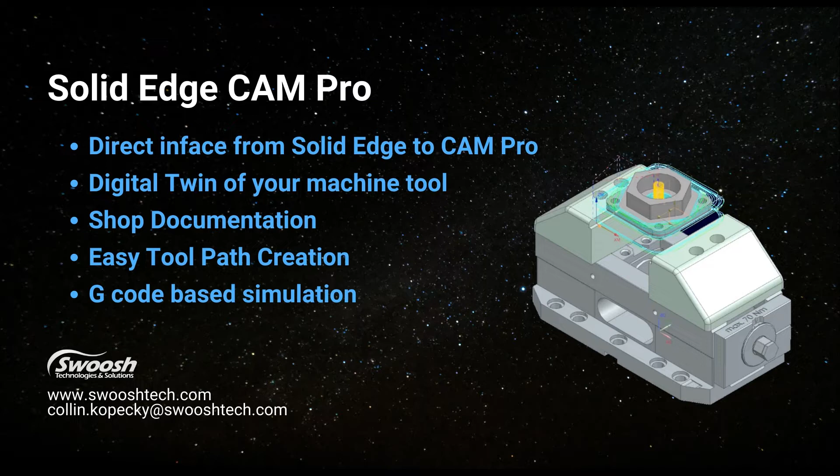Once the programming is complete, with CAM Pro simulation, you can validate the program using full G-code based simulation, and that will detect any sort of collisions or machine axis violations based off of the kinematics of your machine tool. With all the tools available within CAM Pro, you'll be able to provide an accurate and validated NC program to the machine tool operator that will reduce setup times and maximize machine uptime.

Looking at the manufacturing workflow with Solid Edge and CAM Pro, you'll start at the conceptual phase. This would be more of a manufacturing engineering role. This is where you would determine the work holding, stock conditions, and general setup within Solid Edge.

That information would then be transferred into CAM Pro, where you can begin job creation. This is where you would determine the tooling used and create the toolpaths directly from the solid models and assemblies. While creating toolpaths, CAM Pro has a variety of options available to validate each individual toolpath, and will be able to detect any obvious issues using the internal toolpaths, checking against the assembled models.

Once programming is complete, you have a variety of options to create setup instructions to pass along to the machine tool operator. Before the NC code is released, using CAM Pro simulation, you will be able to check the validity of the NC program on a true digital twin of your real-world setup. And finally, with setup instructions and a verified program, the operator will be able to quickly and confidently set up and run the job.

Solid Edge CAM Pro is a modular programming solution. Additional licenses can be added depending on your organization's needs. Starting with basic prismatic part 2.5D milling, you can create single or multiple stage programs, fully taking advantage of collision avoidance and in-process workpiece transfer.

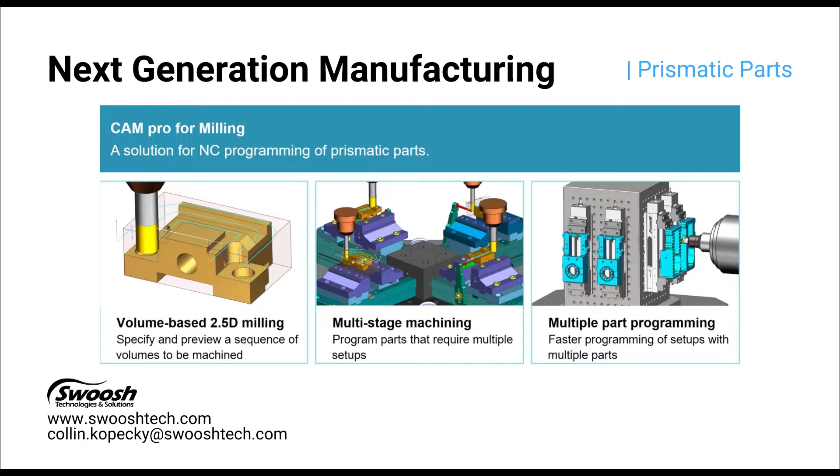With additional licensing, you can expand the capabilities of CAM Pro for more complex 3 and 5 axis surfacing toolpaths, or more specialized toolpaths to create industry-specific parts such as blisks and impellers.

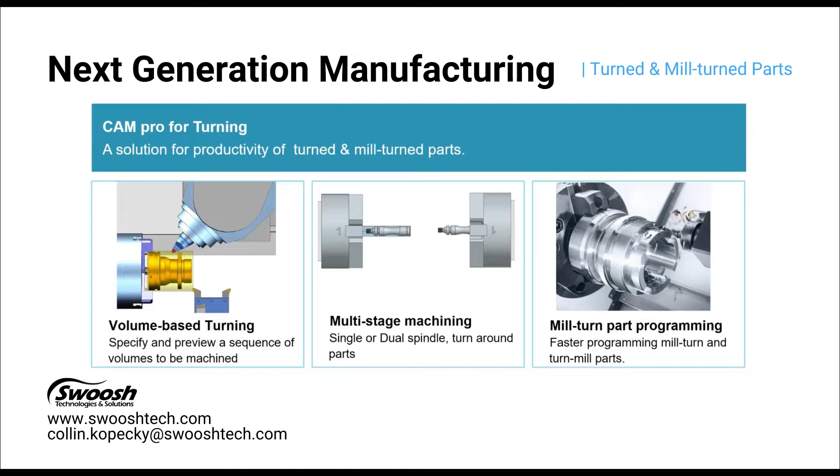CAM Pro is not limited to milling. You are able to create 2-axis turning toolpaths, as well as more complex dual spindle, dual turret, mill turn part programming.

With your program complete, Siemens offers pre-configured post-processors for a variety of machine tools. These are available directly from CAM Pro with Post Hub. Additionally, you can create robust shop floor documentation and provide a validated NC program using CAM Pro simulation to reduce setup times and ensure NC code is correct the first time.

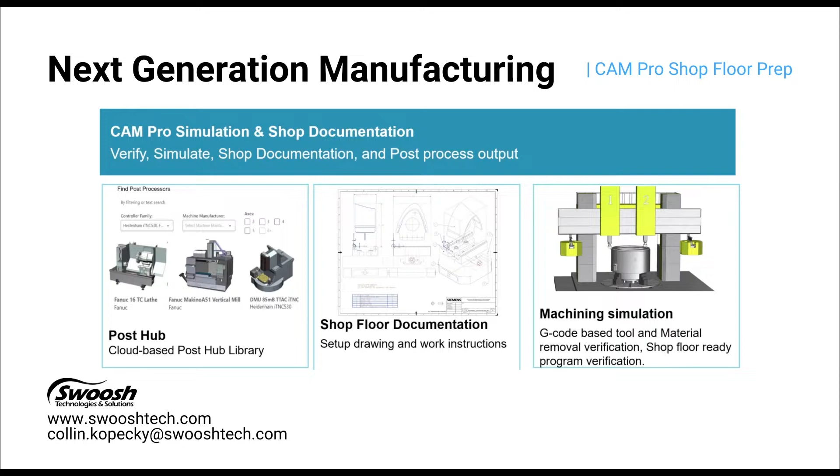Now let me demonstrate for you the process in which to set up a manufacturing file within CAM Pro. I'll start by using the Solid Edge to CAM Pro interface to move our assembly file from Solid Edge to CAM Pro. I'll then define our part and stock and our work holding for use when we create toolpaths, and then I'll import tooling from our library. I'll then go ahead and demonstrate how to create work instructions to be passed along to the operator using the drafting tools that are available to you within CAM Pro.

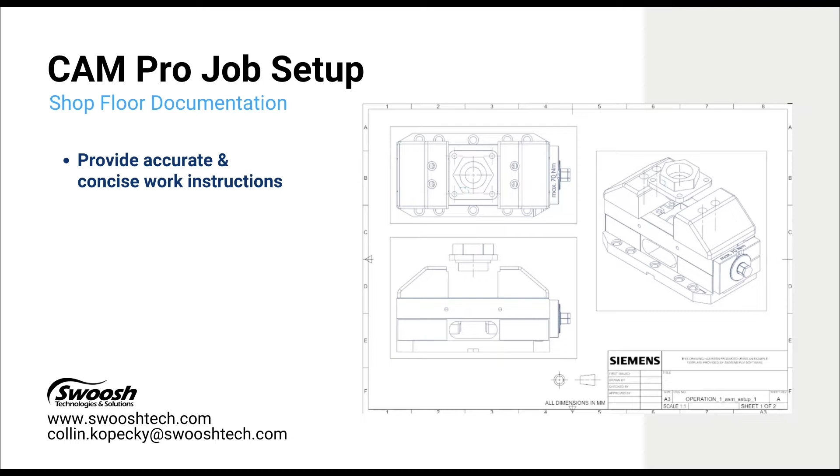Here we are in Solid Edge. We can see we have a fully assembled part. We have our work holding with vise and jaws, our part stock, and our blank, all defined within Solid Edge, using the relations to assemble our assembly. We can move this information into CAM Pro very easily from the tool tabs on the ribbon bar. There's a CAM Pro interface, and that brings our assembled model into CAM Pro.

I'll use this information to create a new setup file, and we can begin preparing our file for manufacturing.

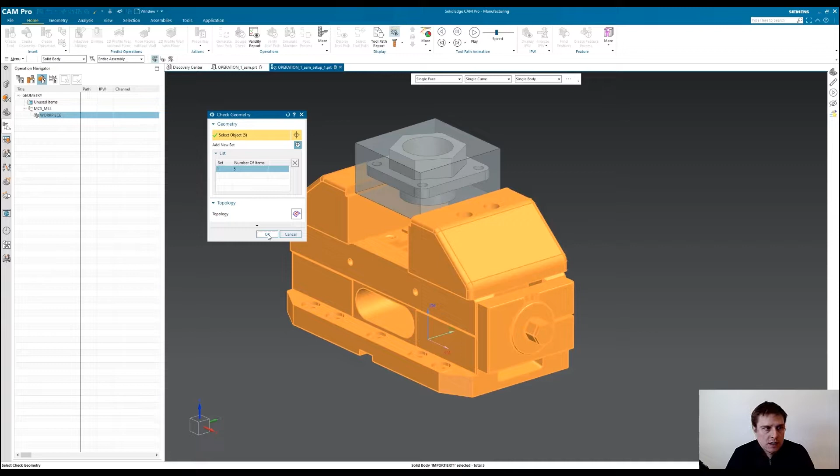I'll go ahead and define my solid geometry. I'll start by defining my part stock and then my blank stock. In doing so, this solid geometry is going to drive our toolpath. So with our blank stock, our toolpaths will be limited to just that blank stock without any additional settings. It's going to automatically recognize the blank stock and limit the toolpath to cut just in those areas. As well as I'm adding check geometry, and check geometry is going to avoid cutting into whatever geometry I've specified. So I specified my jaws and my vise.

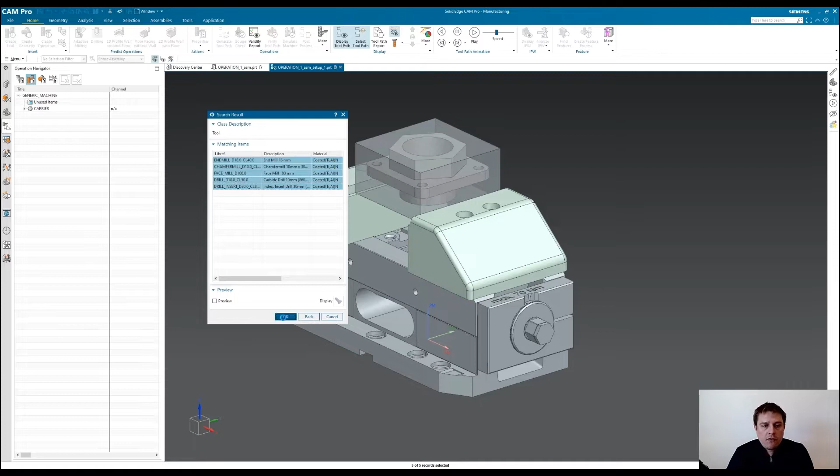Next thing we'll need to create toolpaths is tooling. In CAM Pro, you have the ability to define your tool once and save it to a library, and then retrieve those tools in a new setup file. Here I have 5 tools. I'm going to import all 5 at once.

And now we have the tools necessary to start creating operations. Before I do so, I'm going to create setup instructions using the drafting tools that are available within CAM Pro.

I'm going to start off by creating a draft for the assembly of our work holding. So I'll lay down a few views, and you can have whatever information you deem necessary for the operator to make setup as easy as possible for them. So I have a top and side view and an isometric view to give them a good idea of how the part should be placed, what jaws to use, and so on.

You can go ahead and add some setup notes. Just have a generic message there. It can be as detailed as you want.

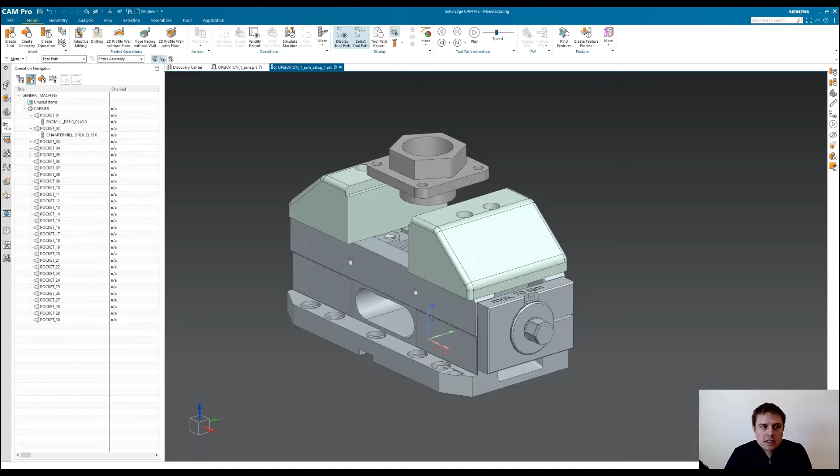Additionally, I'm going to create a draft for our blank stock. Again, the more information, the better for your operator for quick setup, so they have all the necessary information. They're not searching around: what's the size of my blank, what jaws should I use. All of that will be provided to them with these setup instructions.

Again, here I'm creating a draft for our blank. I'll lay down a few views. We can add in some dimensions so the operator knows what size material this is programmed for. And if that matches the real world setup at the machine, they'll know this is good to run.

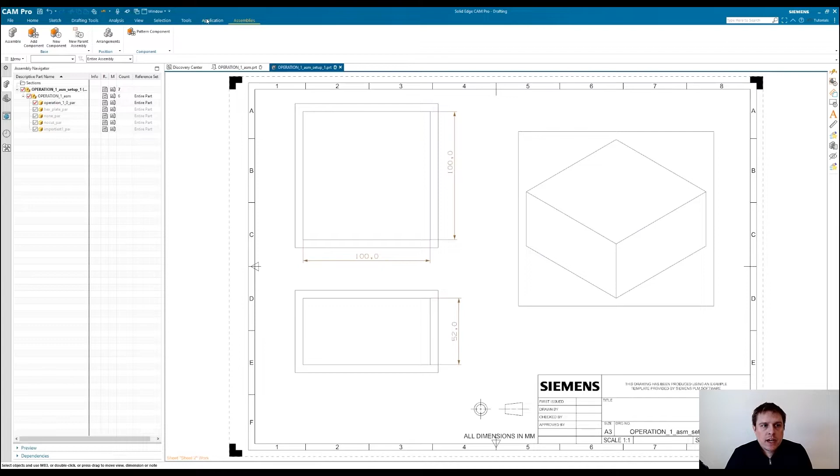So we have our two different views created. We have our geometries defined, and we have the tools necessary to create operations.

With Solid Edge and CAM Pro, you can easily program off a solid model assembly. Having mirrored the assembly that will be on the machine in the real world, we are able to provide detailed setup instructions to the operator, who can easily identify the necessary fixtures, tools, and equipment required to set up and run the job. This will reduce any concerns the operator may have and minimize setup times.

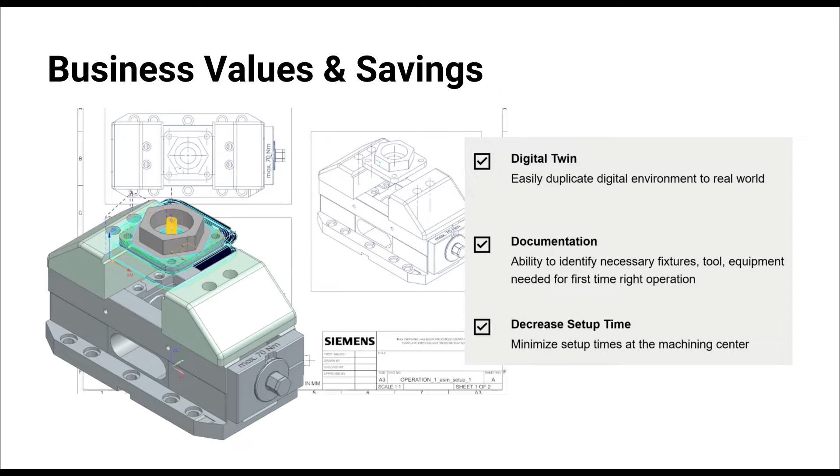Moving on to toolpath creation, I will demonstrate the ability to easily create toolpaths. The toolpaths will be based off the solid models, both the part geometry and blank geometry we specified previously.

CAM Pro utilizes what is known as in-process workpiece, or IPW. IPW starts as the initial state of the blank geometry. Each operation that is created removes material from the IPW, and the material that is removed is tracked in each subsequent operation. This means the toolpaths will be optimized for the current state of the IPW, reducing any unnecessary air cutting.

Additionally, the IPW can be transferred to subsequent operations, removing the need to create the secondary operation blank stock.

Now we'll jump into Solid Edge and I'll demonstrate the programming of this part as well as moving the IPW to the secondary operation. Now that we're back in CAM Pro, I can demonstrate how easy it is to create operations. I'll start by creating a facing operation to remove the material from the top of the part using a face mill.

To create operations within CAM Pro, these are volumetric based. Your selections are going to be based off of your part geometry. So we need only to specify the cut area floor, and I'll select the top surface of our part. We can go ahead and generate, and we have a nice facing operation.

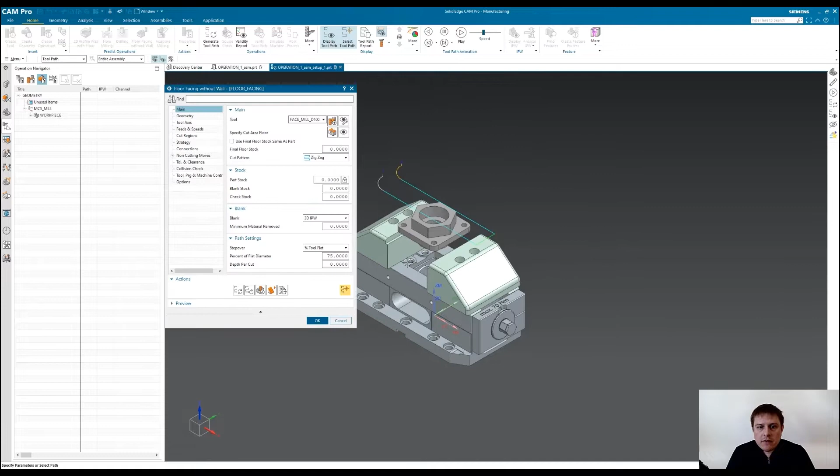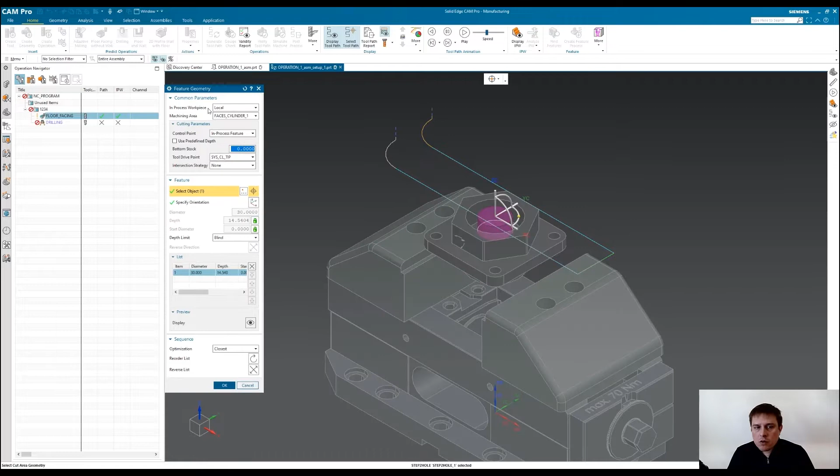The next operation I'll create is a drilling operation, and we'll drill out the center hole of our part. Like before, we need only to specify a face of what we wish to cut. In this case, I want to select a portion of the center hole, and I'll make a few setting changes.

One thing to point out, we see this purple cylinder. That is indicating the material that will be removed from our IPW.

We can take a look at our current state of our in-process workpiece, and we'll note that the face material has been removed, as well as the material removed from our drilling operation. Now each subsequent operation that I create will see that that hole has been removed and base the toolpath off of this current state of the IPW, this pink geometry.

I'll go ahead and create a roughing operation to rough out the hex and that center bore. And for this, I'm going to use an adaptive milling operation, which is a relatively new style of operation.

This is more of a trochoidal style toolpath, where it's taking chip thinning into consideration. You're typically able to, if you're using a solid carbide end mill, use your full flute length of the tool and take a very small step over. With that, you're able to achieve very fast feed rates to remove your material. I've had great success with this in the past on a variety of materials, both ferrous and non-ferrous, to really rough out my material very quickly.

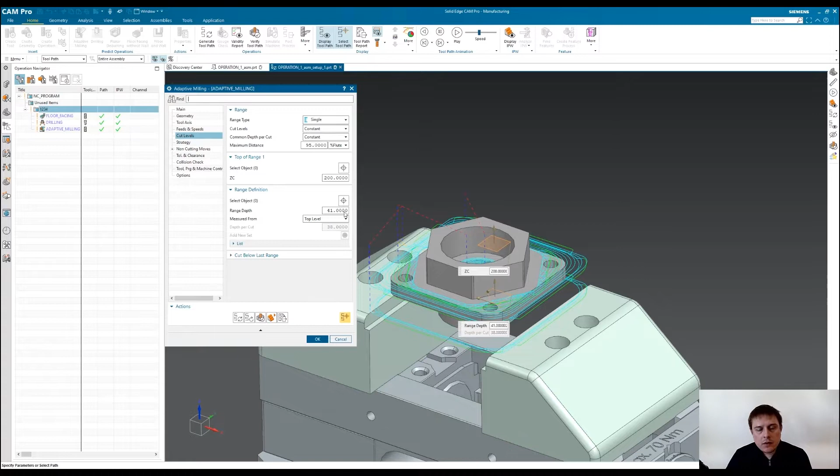We can see based off very few selections, we have a very nice toolpath that's roughing the profile of the part, the hex, as well as our center counterbore.

Moving on, I can create an operation to finish the profile of our part. Just to verify some of our location settings are properly set.

How CAM Pro works is there's a hierarchy. You'll have a parent, and it's going to inherit the information from that parent down to the operation. CAM Pro uses something called methods, and with that method, it's going to inherit the stock allowances into the operation. So with a finishing method, we will not see any stock. It's going to cut right to the wall geometry.

Based off of specifying my wall geometry, I have a very nice profiling toolpath finishing the outside of our part. I'll move on and I'll create a floor finishing for our hex step, this outside area that contains our drilled holes.

Like we've previously seen, we need only to specify what area we want to cut. So I want to cut that step there. And if we want to limit our toolpath to just this outside area, we will need to specify wall geometry.

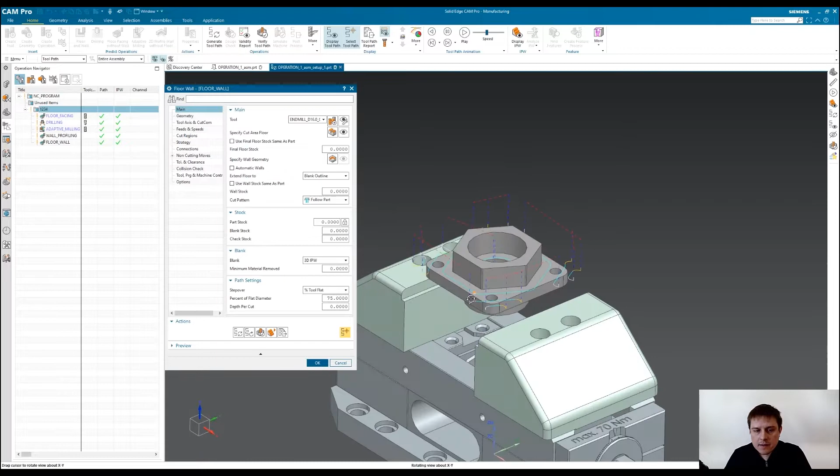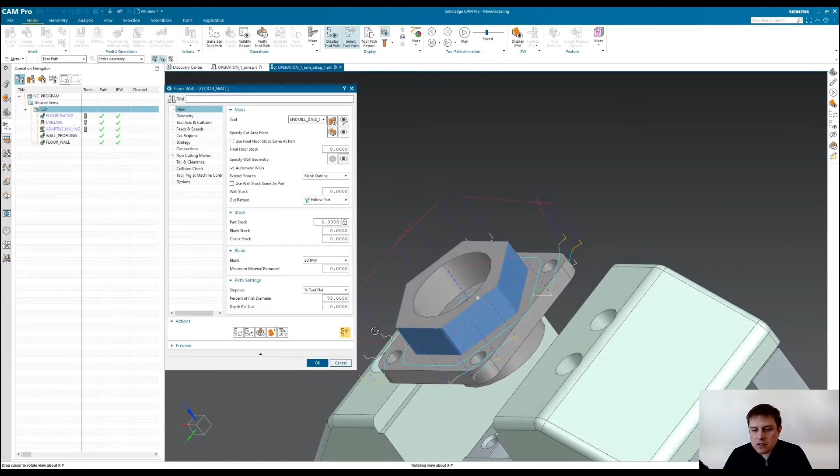Just to demonstrate, we can use this toolpath to fully machine both the step on the outside of our hex as well as this inside diameter. However, I just want to finish the floors of the outside, so we would need to specify wall geometry. We could do that manually, selecting each surface, or there's the ability to automatically detect the walls. If I view what CAM Pro automatically selected, it went through based off of our initial cut area floor selection and selected all of the walls adjacent to that floor.

I can add some part stock to the walls, and we can finish that with a profiling operation. So if that was a critical tolerance that you wanted to cut with a secondary tool, or have a spring pass, adding some stock on this floor finishing pass would be ideal.

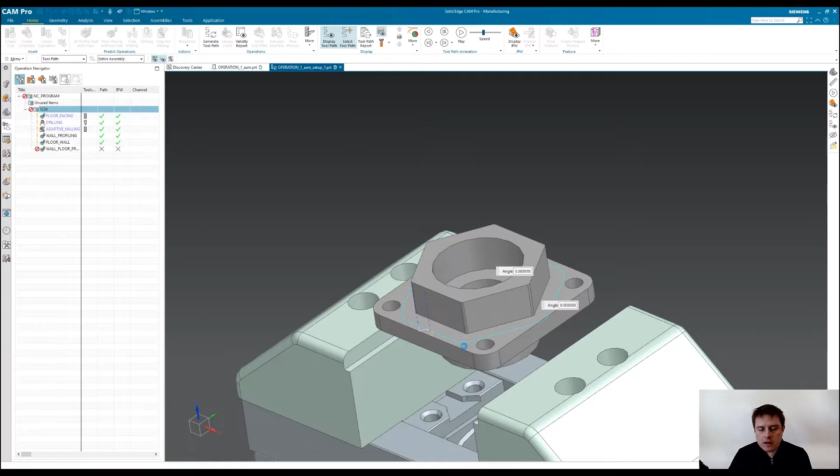Next thing I'll do, I'll create that finishing pass for the hex. And like before, we're able to only specify our cut area floor and toggle on automatic walls, and CAM Pro, again, will automatically detect the walls adjacent to our floor. Once we generate, we have a nice profiling operation to finish the hex of our part.

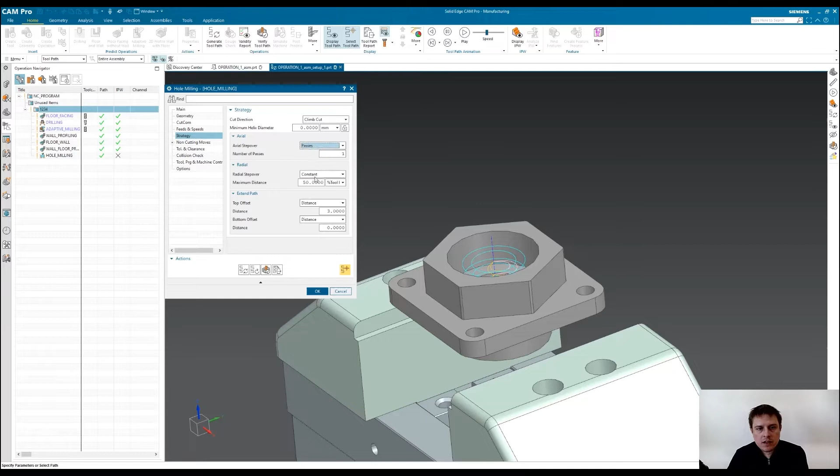Moving on, we can create a hole making operation to mill our counter bore. And we'll make our selection of our counter bore. We can change our cut pattern type to circular. So we'll just plunge down to the bottom of our part and take one pass, removing that material. Looks good.

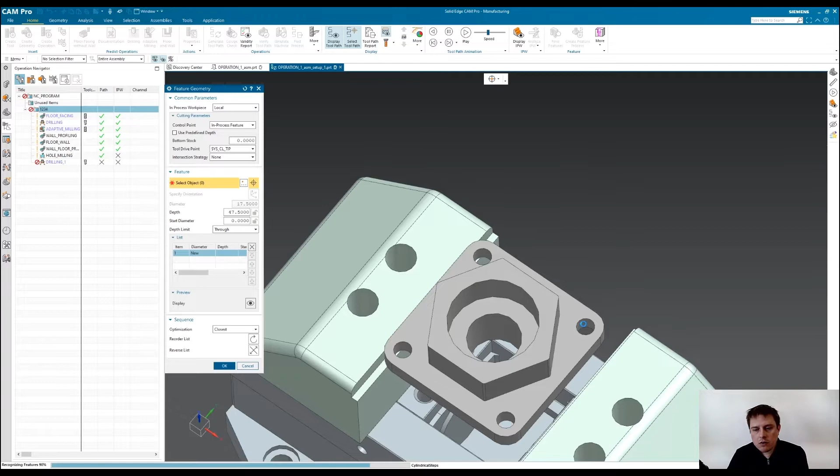Last operation will be our drilling operation for the 4 outside holes. Specify our tool and go ahead and select those 4 holes. And again, we can see the material that is going to be removed. Since this is a through hole, it is going to place our drill below the bottom of that shoulder.

However, you do have the ability to control the depth manually. Let's say we want to go slightly deeper. We can easily do so.

And here we'll want to deburr our part. There's an operation within CAM Pro, Planar Deburring, that will go through and automatically detect every single edge that can be deburred based off of our settings. So we'll give this a depth and a size of our chamfer. And we're going to go through our entire part, and it's going to see all of the edges that it can create a deburring toolpath on and automatically do so.

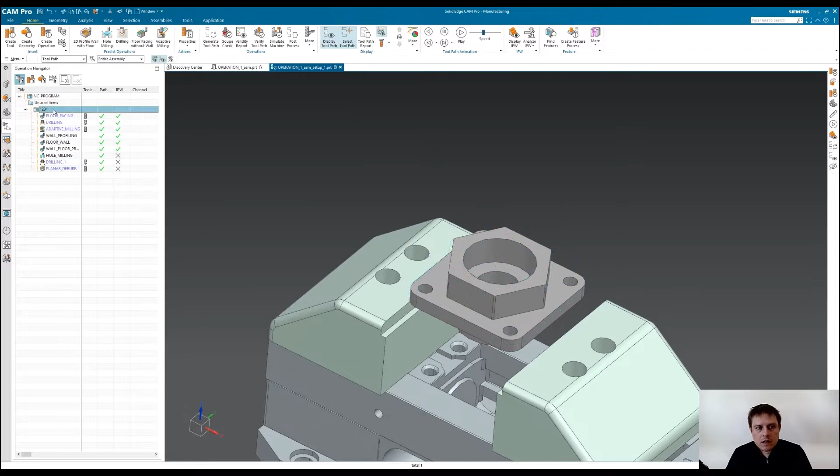So now our part has been completely programmed. We can run this through our toolpath animation just to visualize the material removal. So we have our facing, our adaptive milling toolpath, our wall profile. We're finishing the floors of our hex and then going back and finishing the profile, and then drilling and deburring our part.

Looks good. This first operation is now complete. We can move on to our secondary operation. I'll jump back into Solid Edge.

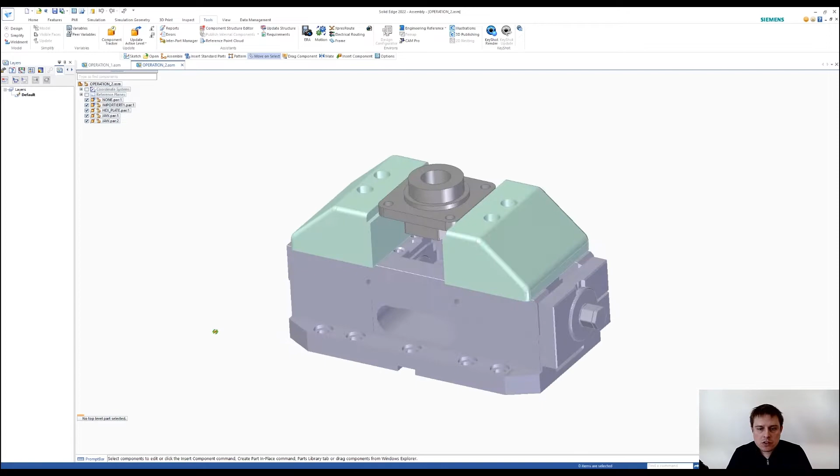Here we have a second assembly. This would be our second operation. We have our part positioned correctly. We can bring this back into CAM Pro using the Solid Edge to CAM Pro interface.

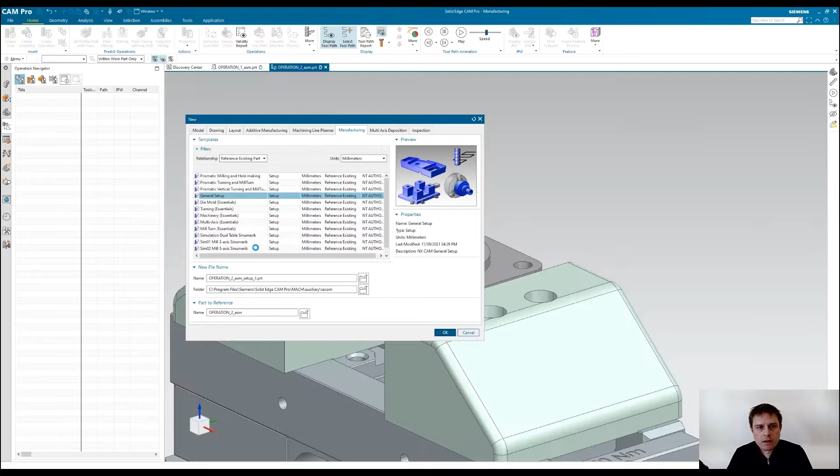And like before, we can create a new manufacturing setup using this information that was assembled from Solid Edge. One thing to point out, this time we did not have any blank stock within Solid Edge. That's because we're going to utilize the final state of the IPW that was created in our first operation.

So I'll go ahead and specify my part. And then when I'm specifying my blank, there's an option for in-process workpiece. And in here we can specify our source. And then we're going to specify our first operation that we just created. And then we'll specify our orientation.

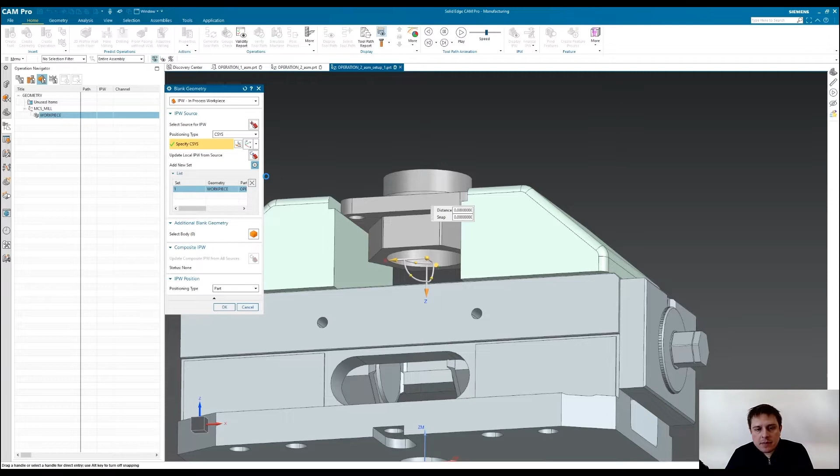And once I bring that IPW in from the first operation, we can see our part, or our IPW, is now positioned correctly. And there we have the final state from the first operation automatically brought into our secondary operation. So we're going to have a very accurate representation of what material we need to remove.

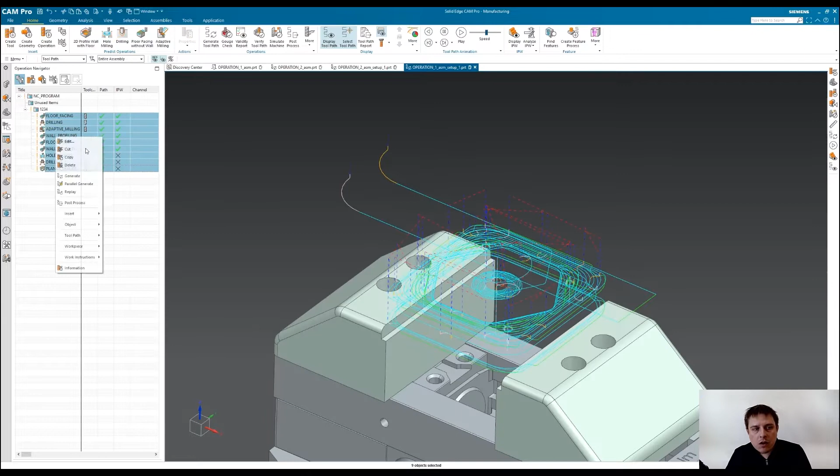One nice tool with CAM Pro, if I go back and do my first operation, I can copy all of those operations. So any setting changes I made here, I can copy into my second operation. This is not only going to bring in the operation, it's also going to bring in the tooling as well. So I can go through and just make some setting changes. I'll have to respecify my cut area floors.

Here I quickly created that facing operation just by reselecting. We don't need that drilling. I will use this adaptive milling one more time. I will just need to

Make one setting change, and then I can regenerate. Then we have all of that information that was set the first time, and we just copied it over and quickly created that second operation.

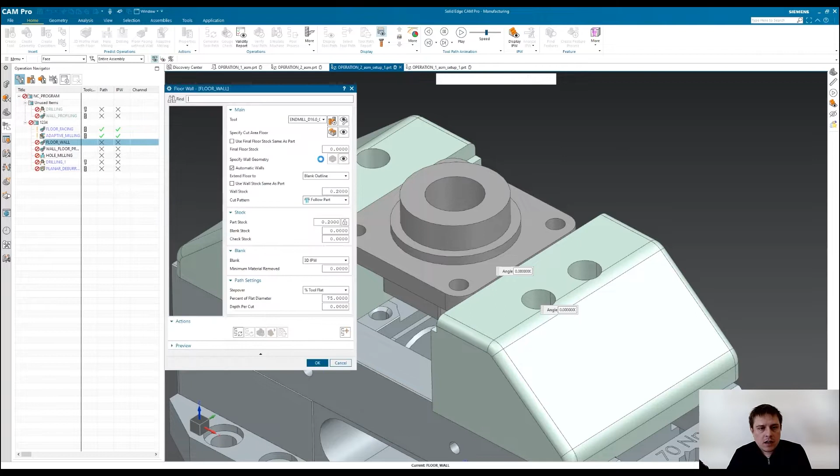Then we can go ahead and use our finished floor, select our operation. Our automatic walls was specified the last time we created that operation, so it automatically detected the walls adjacent to that floor.

Just going through, we can again make some additional operations. We'll do a wall profile for that diameter.

Just going through and using the same operations to finish our part. Some of these I'm moving to unused since we don't need them. We're not going to need drilling.

One other option you have within CAM Pro is you can copy and paste operations from the same setup file. So I'll use that wall profiling for that bottom diameter. I'll use that as well on the top step.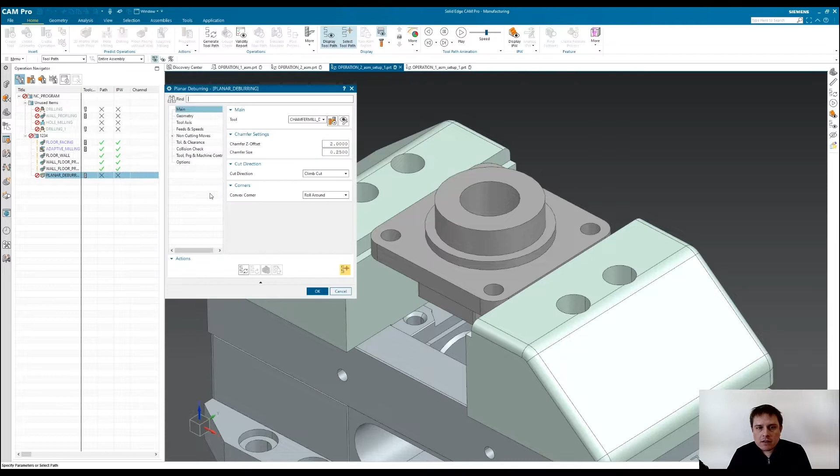So you're very easily able to create operations based off of actual geometry selections. Again, very quickly. And then again, we can use that planar deburring operation. I can just regenerate that one. No setting changes are needed.

One thing to point out is I never went through and specified my check geometry, so it is trying to cut into my jaw. To demonstrate what that looks like, if we had specified that initially,

we can see all of our operations go out of date since something has changed and it needs to regenerate those toolpaths. Since we added that check geometry, it's going to want to go back in and verify all of the operations aren't going to interfere with our jaws.

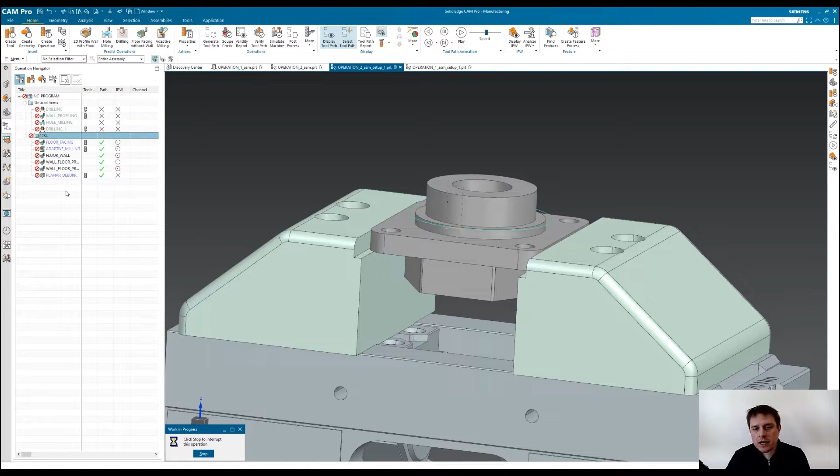Once that planar deburring operation is regenerated, we'll see it will avoid cutting into our jaws. And it's getting as close as possible without colliding. So if I place that near that operation, we can see, yep, we now have a collision-free toolpath.

With CAM Pro, you can easily create toolpaths based off faces of solid geometry. The operations are based off of the in-process workpiece, and the toolpaths will avoid any unnecessary cuts since it is looking at that preceding operation's IPW.

The IPW can be transferred from one operation to another. This is going to save time having to create any extra geometry. As well, you can be sure that the blank stock used in that preceding operation is accurate since it is referencing the first operation. As well, some other time-saving abilities in CAM Pro.

You can copy operations from one setup file to another. That's going to reduce the need to make setting changes, saving additional time programming.

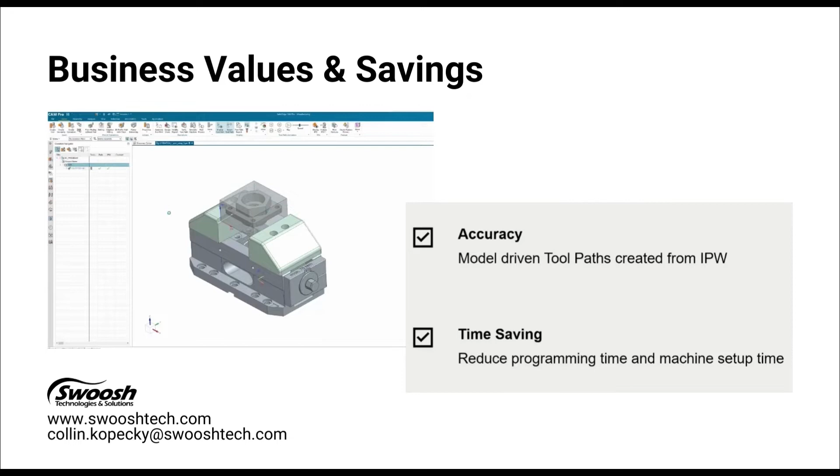With CAM Pro, not only can you create setup drawings, but you can quickly create tool lists and work instructions to provide to the operator. The work instructions can include detailed tool lists and detailed operation lists.

As well, CAM Pro directly interfaces with Solid Edge. So if there's a revision change made to the part model, the toolpaths in CAM Pro will be automatically updated based off of those revision changes.

Here I'm back in my first operation. If you remember from earlier, we did create some setup drafts. I'm going to utilize those drafts when creating work instructions.

So I'm going to create both a tool list and an operation list. I'll start with a tool list. Here we can reference those two sheets that we created, one of the setup itself, and then one sheet for the blank.

We can take a look at this tool list with a preview, and we can see both sheets are imported, and we have every tool that was used in this setup, as well as the operations that tool was used.

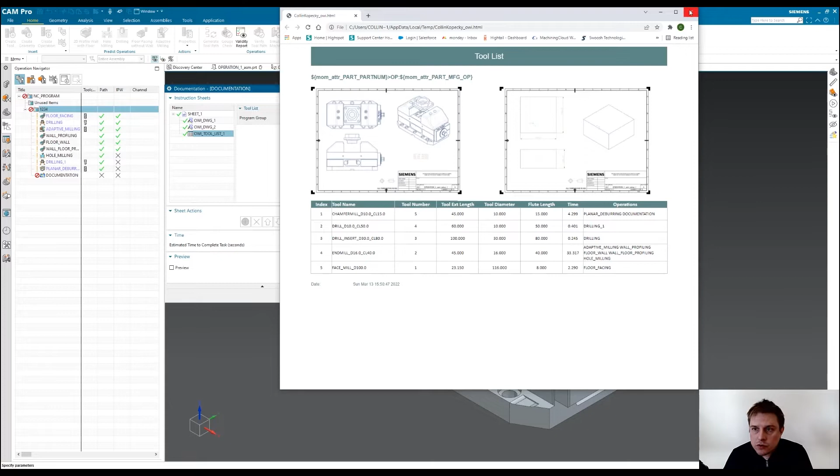We can take this one step further and create an operation list. Here we can select a view or take a screenshot of how we currently are. We can enter in any text for the operator.

And then we can go ahead and publish this documentation. There's a variety of choices. You have HTML, PDF, or CSV files.

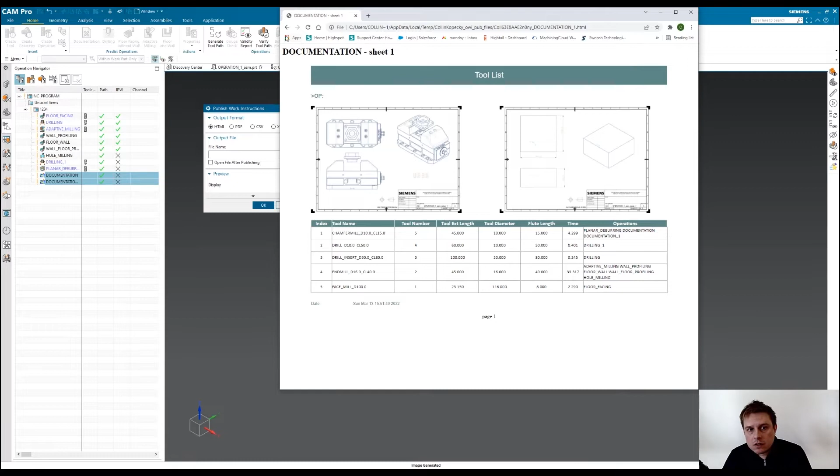And take a look at the preview HTML file that's created. And we have two different sheets created. There's our tool list. Then we have our operation list.

With the operation list, you'll have each operation that is created in its order, and whatever description you might have added, as well as a toolpath times. Very useful tool, very helpful to the operator.

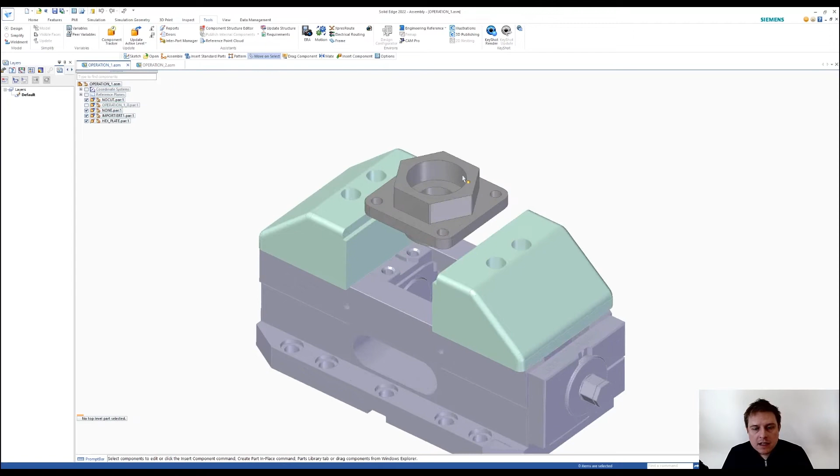As an example, we can imagine that there was a revision to our part. So if I jump back into Solid Edge, here we have our first operation. We can go ahead and make a few changes. Let me hide the blank stock. Then I'll go ahead and edit my part geometry.

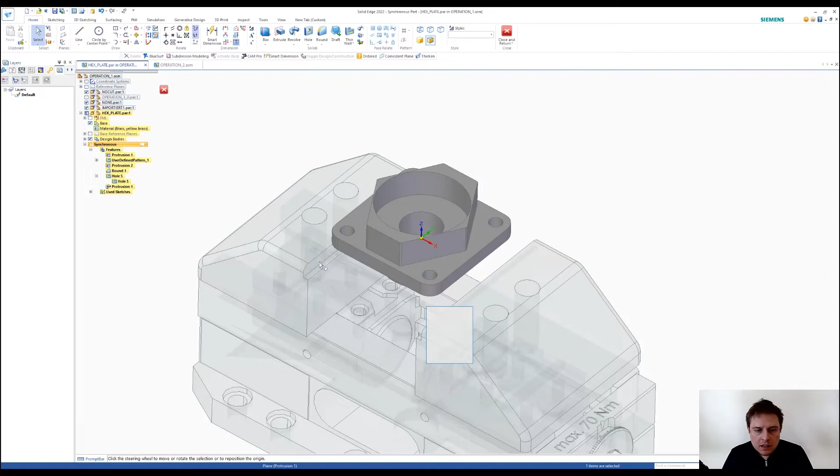And I'll just move a few faces randomly. We can change diameters of holes if we needed to. We'll say our larger counterbore diameter is now 65 millimeters. We can elongate our part. And let's say we didn't want that hole anymore, we could remove that hole.

Looks good. We will need to modify our blank stock as well, just so we have enough material. And with our changes, we can see we have a lot of extra stock on the ends of our part. That's okay, CAM Pro will automatically recognize this.

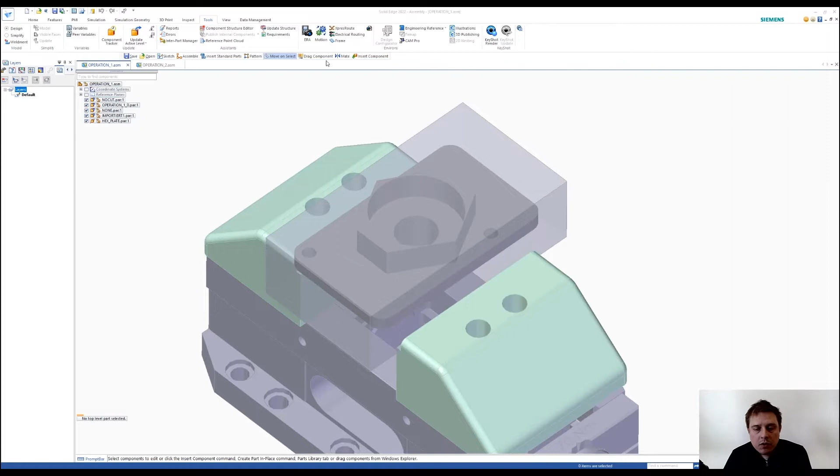So I'll go ahead and save the changes that I made, and I'll use the Solid Edge to CAM Pro interface tool once again. It's going to go through and update our existing setup within CAM Pro. And with everything updated, we can go ahead and regenerate our toolpaths.

We can see as it's generating, everything is adhering to the new model definitions. The hole that was removed is no longer being drilled. We now only have the 3 holes.

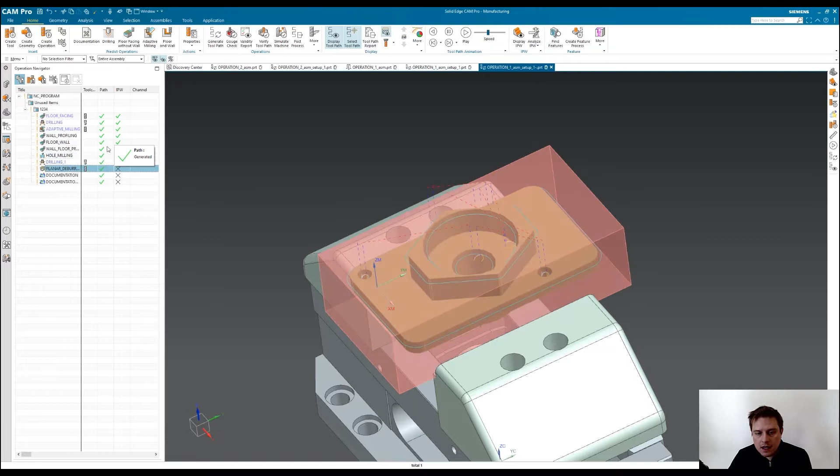I'll just cycle through. Maybe I'll toggle off my blank stock so we can see our toolpaths a little easier and how they were updated. We're facing and drilling, and our adaptive milling operation is now updated to that new blank stock. Same with our wall finishing toolpaths. And again, the holes that were removed were also updated.

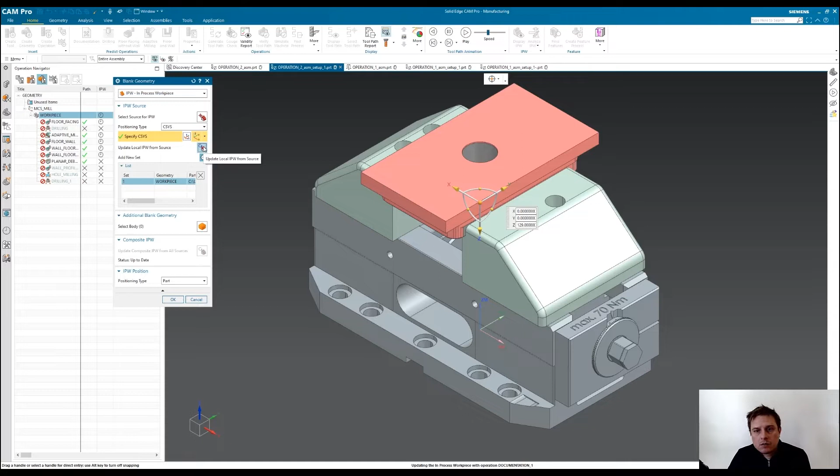Then we'll take a look at our secondary operation. That will be updated as well. We will have to redefine our source, we'll have to update from our source. And once we make that update, we can see the IPW changes made from our first operation are now transferred over.

And we can again just regenerate these operations, and everything will be updated accordingly. So not only if you have a revision change on your first operation, will that change your first operation, but it will also change your secondary operation as well, and update that IPW if you are referencing a previous operation.

With CAM Pro, since you are working in the context of a physical assembly, you can provide accurate and concise and easy to understand work instructions to the operator, and this will minimize setup times at the machine center. The operator will have all the necessary information on the items required to set up the machine with work holding and the tooling information, as well as all the tool paths that will occur in the program.

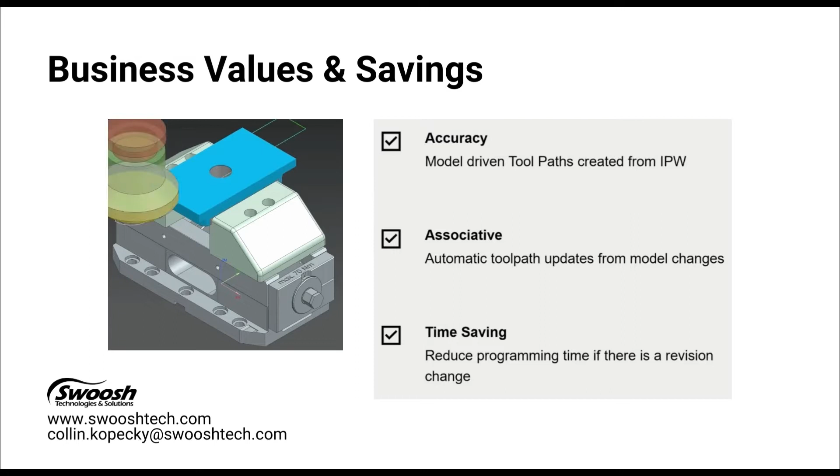If a revision occurs, the models in Solid Edge are fully associated with the models in CAM Pro. You will need only to regenerate the operations and everything is updated, saving time reprogramming if changes occur.

Taking verification one step further, CAM Pro can fully simulate the kinematics of the machine based on the post-process G-code. Simulation will fully detect any collisions that may occur and will detect any limit violations. It's better to have a crash on the digital twin and not in the real world. This is going to save on expensive crashes and unnecessary downtime. Let me show you simulation.

Back in CAM Pro, here we're in a new part file. This is a more complex aerospace style part, and this is the secondary operation of that part. Just want to point out that the IPW will transfer on more complex geometries.

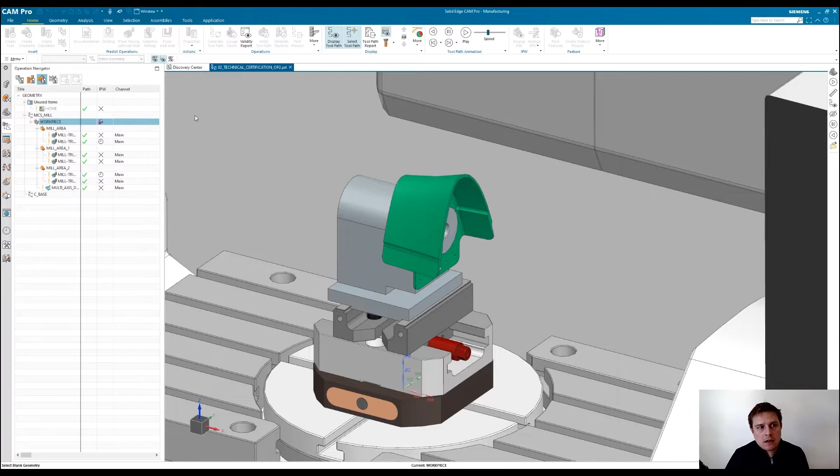That first operation had a bunch of multi-axis surfacing toolpaths. So that IPW, if you were to recreate this, it would be very extensive to get an accurate match from that first operation. Utilizing the in-process workpiece from that first operation is sometimes absolutely necessary if you want a very accurate representation.

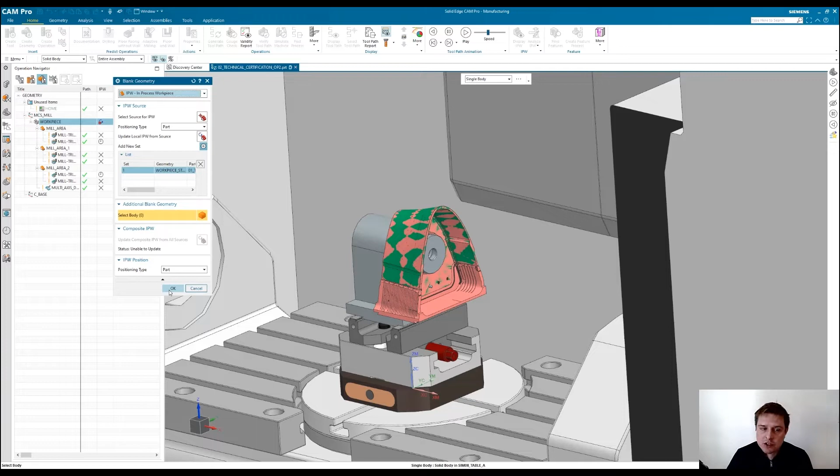Next thing, I'll jump into the CAM Pro simulation. What this is going to do is post out the G-code that we would provide to the machine tool operator, and run through and move the kinematic model based off of that G-code. This is going to have an absolute representation of what would occur at that machine tool.

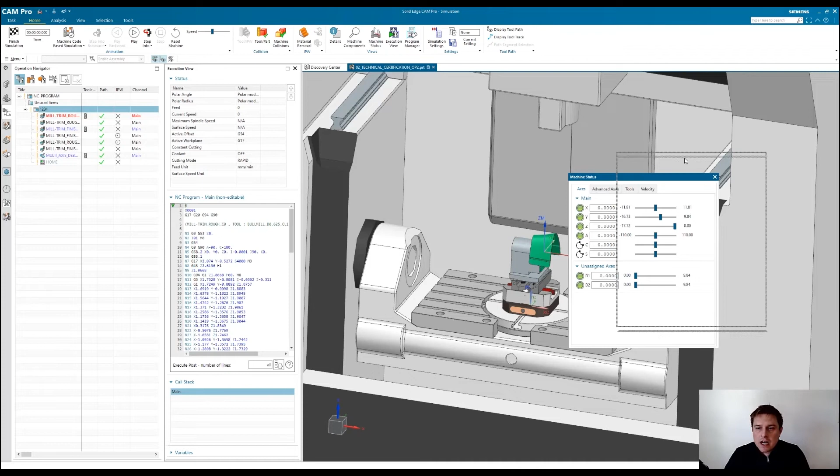Here we go. Looking at this NC program, we can see our code has been posted out. We can also toggle on our machine status. We'll be able to see where in space our tool is, and our table, and all of our axes on our machine. Here we can toggle on material removal. That's going to show the IPW from that previous operation.

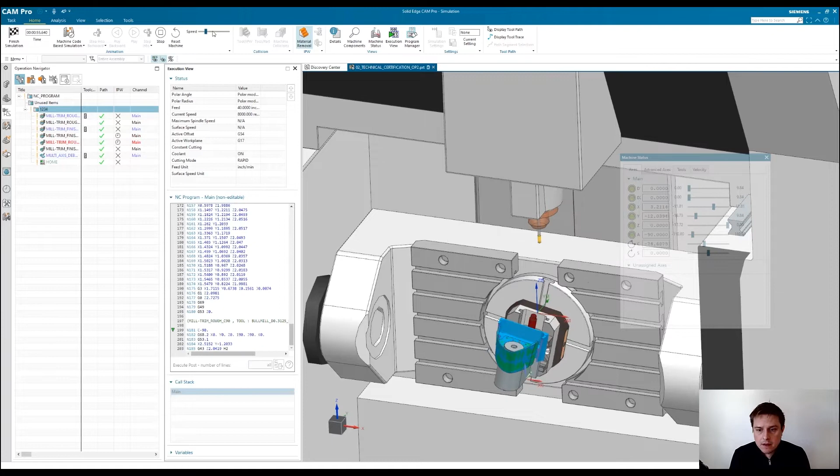And we'll play this through. This is going to demonstrate some of the additional modules available within CAM Pro. There is a multi-axis deburring operation that will quickly go through your part and create deburring operations. It works very similarly to the Planar Deburr, automatically detecting the surfaces on your model that can be deburred. That's one of the more advanced toolpaths available when you purchase those additional modules.

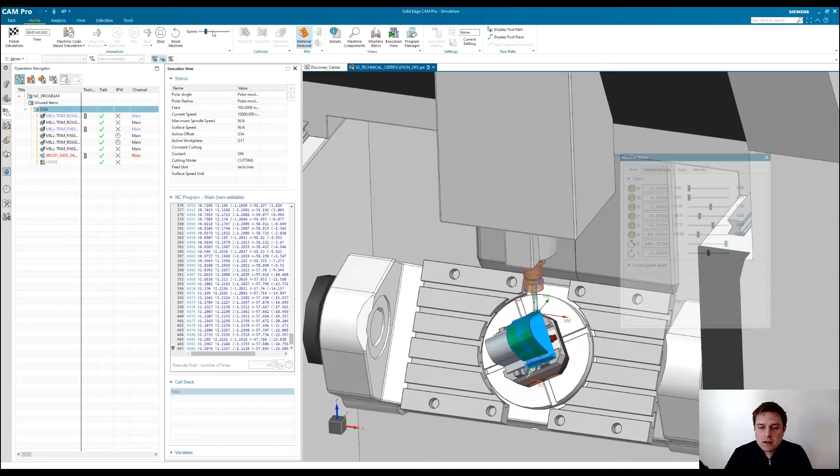In this particular program, there are no collisions. If a collision did occur, there would be a warning: the model would turn red and point out exactly where that collision is occurring. Here we have that more complicated multi-axis deburring toolpath. All of the retracts were automatically calculated based off of a value. Here we can see our machine fully moving in 5 axes.

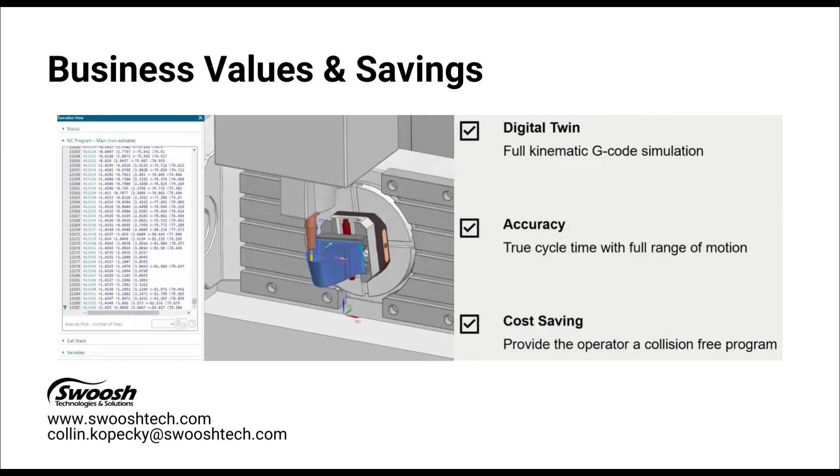With CAM Pro simulation, you can fully simulate the kinematics of the machine based on the post-process G-code. Simulation will fully detect any collisions that may occur and any limit violations. Since your real-world machine kinematics match your digital twin, you can get a very accurate cycle time before running at the machine. This will assist in costing a job, eliminating the guesswork of what the actual cycle time is. With G-code based simulation, you can provide the operator peace of mind when running the first article part program.

To summarize, CAM Pro will offer a competitive edge when creating CAM programs. You can do all of the job planning within Solid Edge, taking advantage of the robust assembly relations. CAM Pro is a model-driven CAM solution with easy toolpath creation. Many of the operations within CAM Pro, you will only need to select one face of the model to create a collision-free toolpath. CAM Pro's ability to track the in-process workpiece from one operation to the next will eliminate unnecessary toolpaths. Also, the ability to transfer the IPW from one setup to another will eliminate the need to create extra geometries.

You have the ability to provide concise and easy to understand work instructions to the operator, which will minimize setup times at the machine center. As well, with G-code based simulation, you're providing an error-free program, free of any collisions or limit violations. Combined, all of these tools within CAM Pro will provide a significant time savings when programming and running parts at the machine.

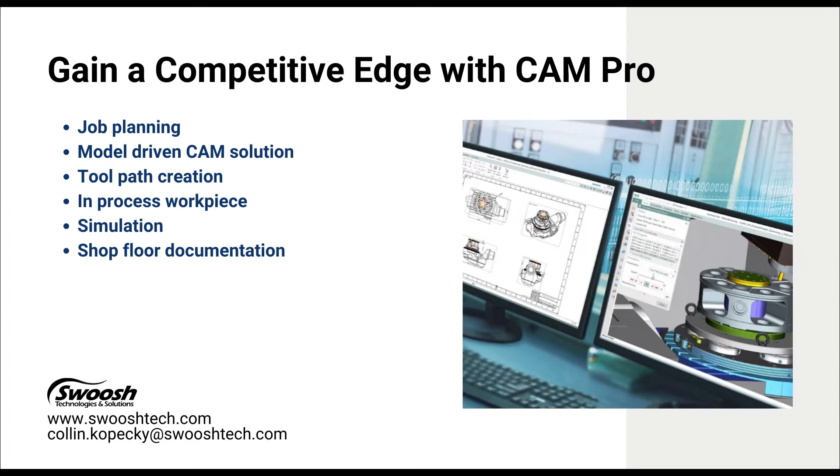In this segment, I will cover some commonly overlooked tools in CAM Pro that will help increase productivity. I'll demonstrate the reuse library, how to copy operations using transform, the ability to mass edit operations, and compare operations from one to another. Finally, I will end with using a solid model tool holder provided by the manufacturer to easily define the holder steps when creating a tool assembly.

The first hidden gem I would like to show you is the reuse library. The reuse library is a hidden tab on the resource bar that is off by default. Having all of your commonly used fixture models stored in a central location, the reuse library will reference that location to import your fixture models. Once the tab is added to the resource bar and the folder is referenced, adding a fixture is as simple as dragging and dropping into your workspace. With the fixtures imported into CAM Pro, you can easily assemble the model using CAM Pro assembly constraints.

Following the reuse library, the next hidden gem I'd like to show you is the tool used to copy operations. The transform tool has multiple settings on how to transform an operation: you have move, copy, and instance. In the example I will show you, there are multiple identical parts in one assembly file. Rather than programming each part individually, transform will allow you to copy already created operations onto multiple parts. With this option, instance, the copied toolpaths will remain associative to the original operation. Let me demonstrate the reuse library and the transform tool.

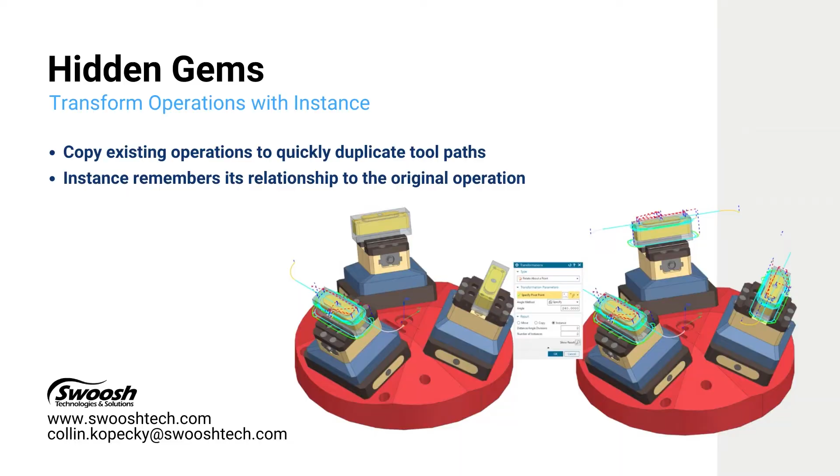As I mentioned, the reuse library in a fresh installation of CAM Pro is off by default and will need to be toggled on from the resource bar. On the resource bar, if you right click, you have some options to toggle on and off tools. Here we can see the reuse library is off, so we'll toggle that on, and now a new tab has been added to the resource bar, and we can begin selecting our folder that contains all of our fixtures. If we right click in the open area of the reuse library and select library management, we can add a new library and browse to the location of our fixtures.

With the folder selected, we can see we have a new library available to us. And in here, we can browse to the fixture that we want to bring into our assembly.

There's some additional options to view what you're importing. We can see a small thumbnail of the model, and if we expand the preview window, we can see a larger version of that thumbnail. From here, this is the model I want to bring in, so I'll just hold down the left mouse button and drag it into my workspace. And the model and assembly is automatically imported.

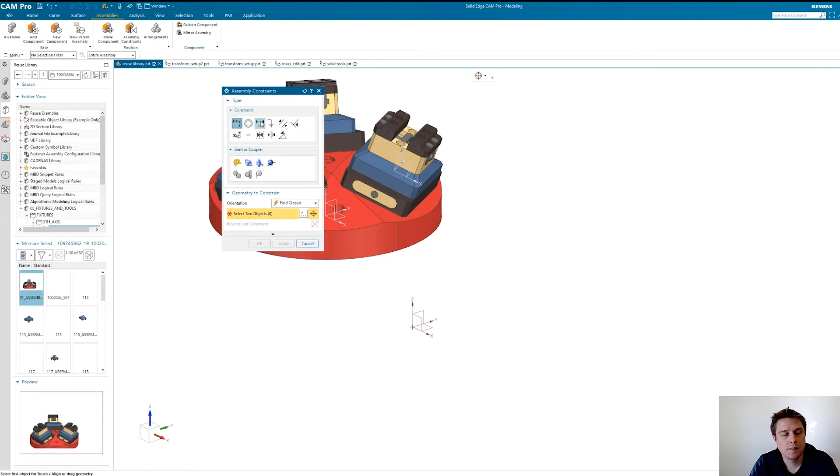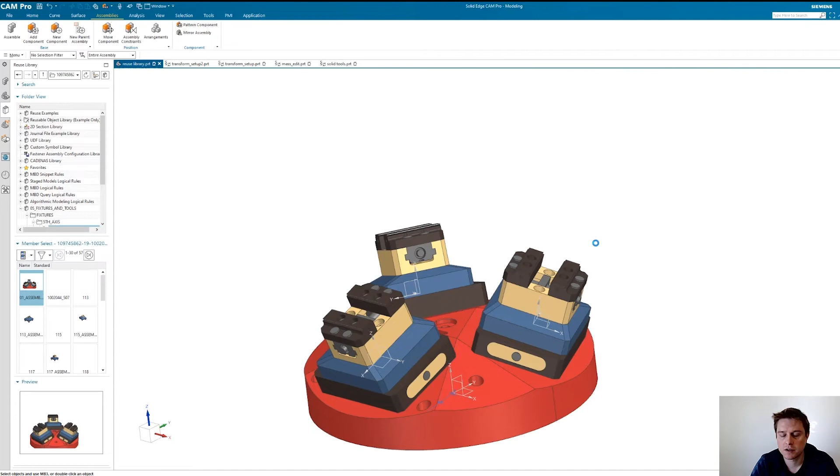I can use the tools available within CAM Pro, the assembly constraints from the assembly tab on the ribbon bar, and quickly position our part. I'm going to position this assembly to the center point of our machine tool, this datum that already exists. And then we can use this fixture later in our next example. With our fixture positioned correctly, we can begin bringing in our part components, our stock, and assemble it to our fixture.

Moving on, I'm going to demonstrate the transform option within CAM Pro. This is the activity from our previous session. We have our part completed. However, there are two additional fixtures added. Rather than having to go back and programming each one of these operations individually, we can use the transform tool to have this done automatically.

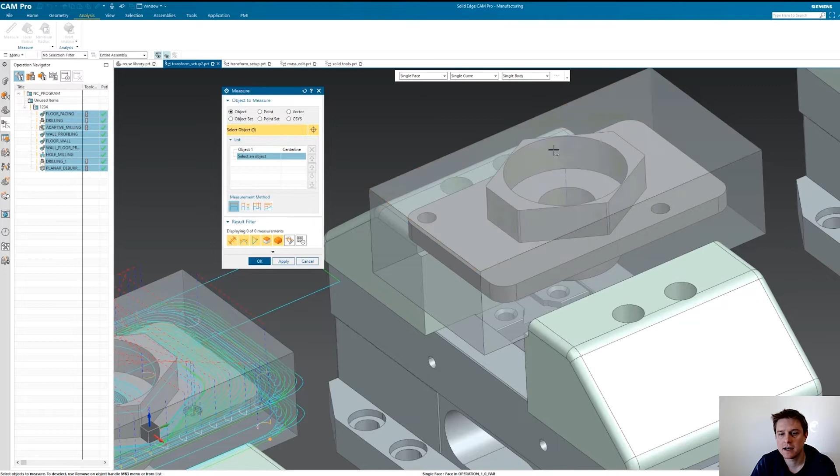So I'll select all the operations I wish to copy, and then right-click Object Transform. And we're going to move this in the Y direction. Right now, I could take a guess at the distance, or I could use the Measure tool under the Analysis tab to find out this value. So I'll go centerline to centerline to get this value. So we have a distance of 300 millimeters.

So this is going to be the total distance. We have 300 to there and then 600 to the second fixture, so we'll have to add in that value. And then we'll have to specify the number of instances we want to create. That's going to be 2. So it is going to copy that toolpath at 300 millimeter increments.

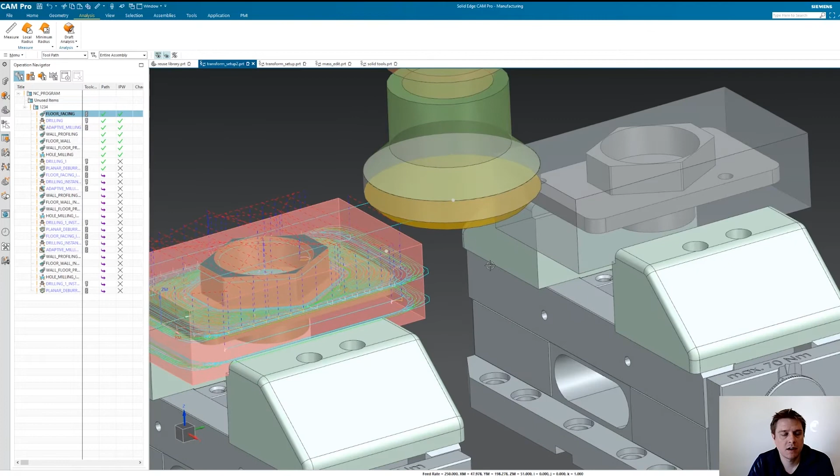Now with our toolpaths transformed as an instance, if I wanted to make a change, let's say this face milling - I don't like it getting so close to the other part - I can go ahead and change the position of the parent operation, the one that we transformed, to change that cutting vector and regenerate that one operation.

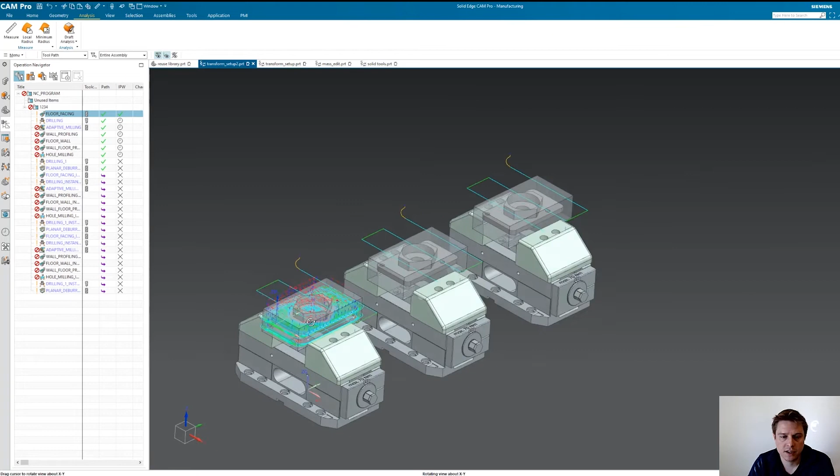And I'll go ahead and inspect the rest of the operations. We can see it's automatically updated on the other two. Because our subsequent operations are referencing the in-process workpiece, all of them will need to be generated since something has changed to the prior operation.

We can see the instance toolpaths are doing one part at a time, so you would have to reorganize manually just so you're machining in a good order rather than tool changing back and forth.

In this next example, I'll demonstrate a different method to organize your program when you are doing a transform. Here we have our assembled fixture from the reuse library and toolpaths already applied. So again, I'm going to highlight all of my operations. Mouse button 3, object transform.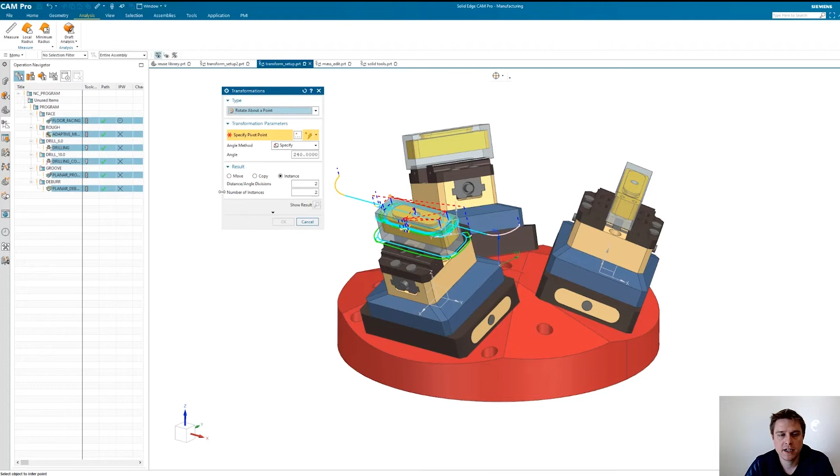And rather than using a vector translate, I'm going to do a rotate about point, and I'm going to specify the center point of my fixture. And now we have our toolpaths transformed, and they are in the proper order.

We are going to be facing and then changing the tool, do all the roughing, just so you don't have all this wasted motion and you're not having to manually reorder your program. If you have each operation in a program group, it's going to place that instance of the operation within the program group, maintaining that good workflow without having to reorganize manually.

If the manufacturing setup is not created with the Solid Edge part file, using the reuse library to assemble your digital twin within CAM Pro will allow you to quickly locate and add fixtures that are required to set up the job. As well, the ability to transform operations as an instance will allow accurate and associative toolpaths to multiple parts. Rather than programming each part individually, transform as an instance will allow you to duplicate toolpaths while remaining associative to the original operation. If a change needs to be made, you need only to change the original toolpath and all instances will automatically update.

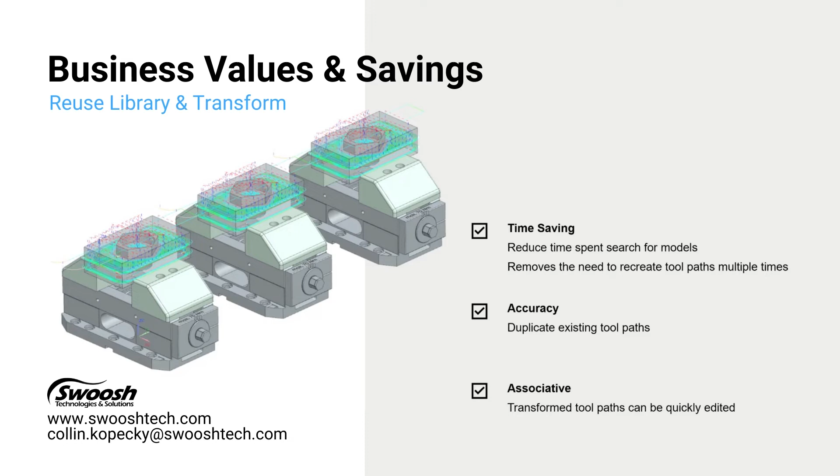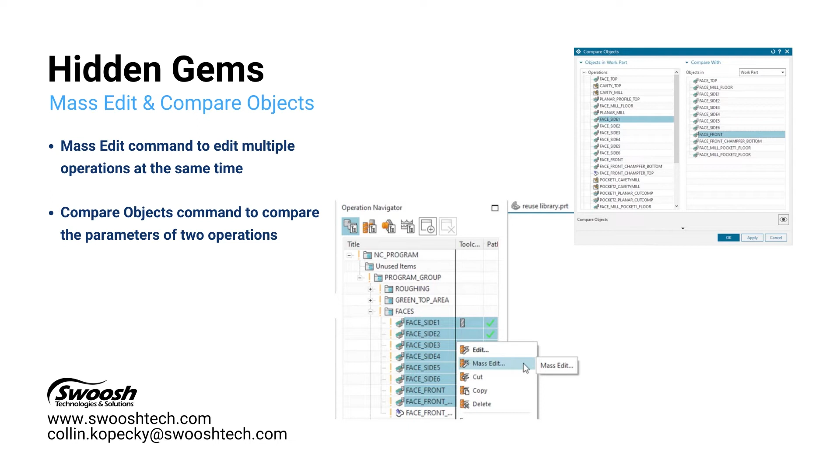The next two tools I would like to show you deal with the settings within an operation. The Mass Edit tool will allow you to change multiple operation settings with ease. Rather than editing each individual operation, the Mass Edit allows editing several operations at once. With Compare Objects, if you've ever had two operations that are seemingly the same but produce different toolpaths, Compare Objects will assist in determining what settings are different and need to be changed. Let me show you Mass Edit and Compare Objects.

I'll now demonstrate the Mass Edit tool available in CAM Pro. Here we have a part already programmed with 6 similar operations facing off the material of our part.

I could go in and edit each one of these individually. For example, if I wanted to lighten up the step over, I could go through and make that change in each individual operation. However, with Mass Edit, you can highlight the operations you wish to all change and select Mass Edit.

When we're in the Mass Edit dialog, we can see we're missing some tabs. It's only giving us the options that can be changed for each individual operation, so it's an abridged version. It's not going to allow you to change something that would break the toolpath.

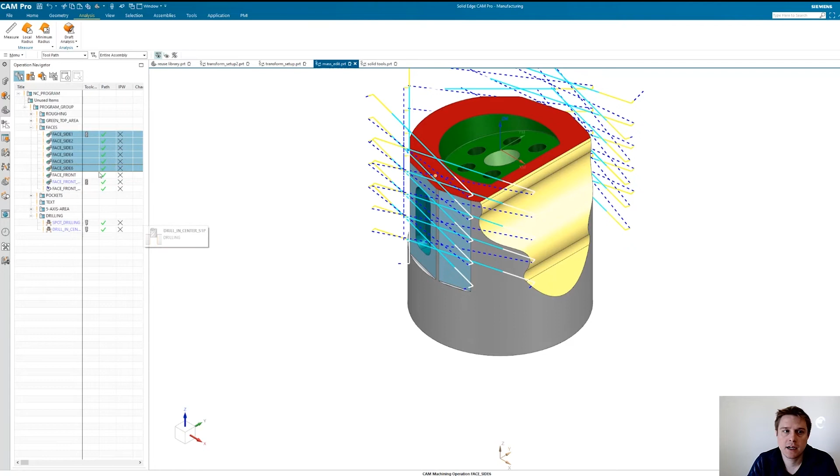In this example, I'll just change the step over from 75% to 50% and OK the dialog. We can see all 6 operations went out of date. I can go ahead and regenerate those operations, and the step over will change for each one that was mass edited.

The next tool I like to show you is somewhat hidden, from the menu, tools, and compare objects. This will open up the Compare Objects dialog, and we can compare one operation to another. For example, I'll compare one facing operation to another, and we'll compare both of those objects.

Once we enter into this dialog, we can see it's only the settings that are different between the two — that's all it's going to show us. In this example, comparing these two facing operations, we can see our step over percentage is different and our cut pattern is different.

If we wanted to match those operations, we have the ability to edit within this dialog. For example, I'll just change the cut pattern, and it's going to update the operation. We can go ahead and generate once again.

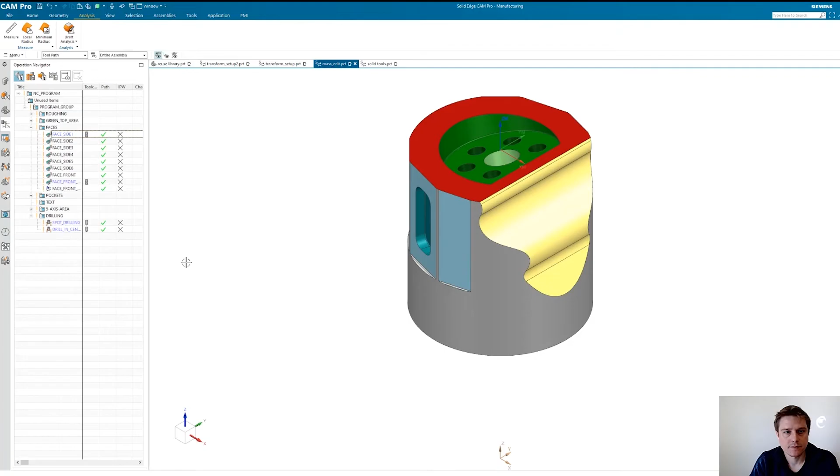With both Mass Edit and Compare Objects, you can quickly and confidently change multiple operations to be identical to one another, rather than having to edit each individual operation, which can lead to mistakes. You are able to make changes in one operation dialog and apply it to many operations.

The last hidden gem I'd like to show you is the use of solid models provided by your tooling vendor to create an internal CAM Pro tool holder. Having an accurate representation of your tool holder is critical to creating a collision-free program. However, defining a tool holder can be a tedious process, manually interrogating the model for the holder steps.

The tool I will show you is specific for rotating milling holders. There are other tools available to handle fixed holders, such as broaching tools or turning tools. Let me show you the holder source option to create holder steps automatically.

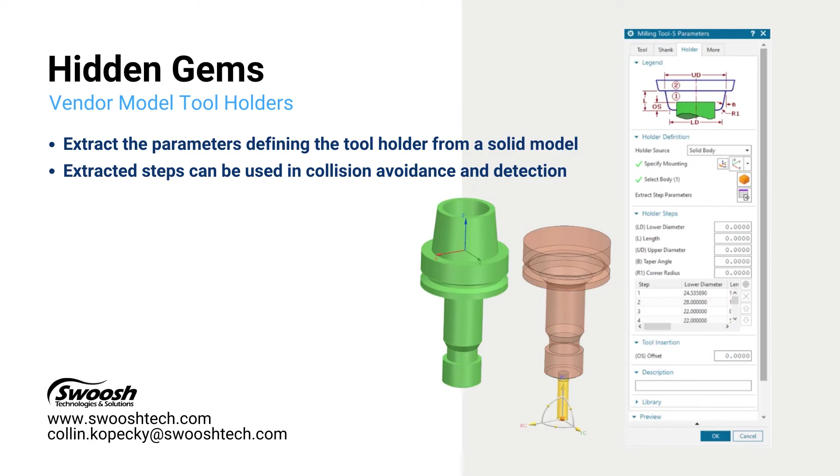Now that we're back in CAM Pro, I'm going to import a tool holder that was provided by the manufacturer of the tool. To do that, I'm going to use the reuse library, and I'll drag and drop my holder. Here we have an ER16 holder.

Next, I'll use this holder to extract the steps automatically. In order for this tool to work, we'll need to create a link body of the holder. Since when we dragged and dropped from the reuse library, that holder was added as a component, it's going to need to be a body within the part navigator.

To do this, from the Geometry tab, I'm going to select Wave Geometry Linker. That's just going to create a copy of that solid body. Here we have that link body, added to the part navigator.

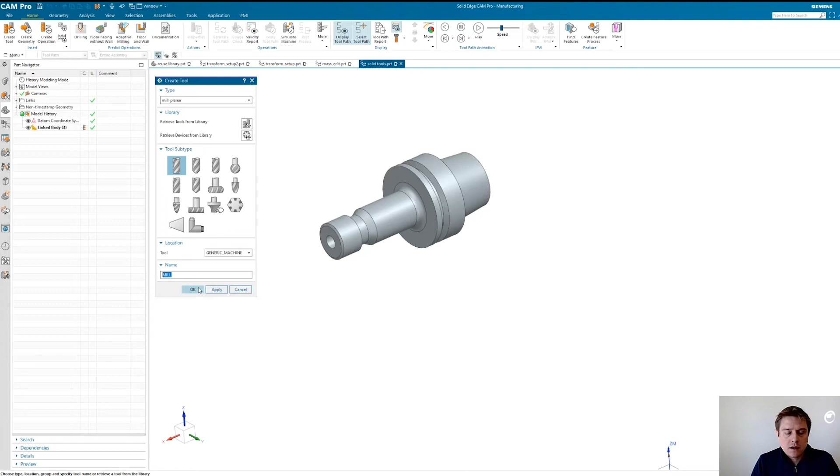Now I'll begin creating our tool. The tool subtype is unimportant since we are only concerned with the holder, so I'll just use a mill. And since this is an ER16, I'll change the diameter — again, this is unimportant, more visual at this point.

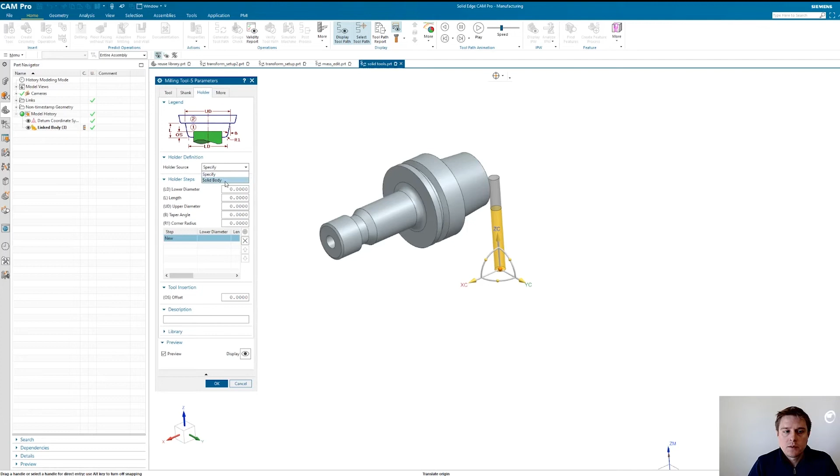I'll switch to the holder tab, and under the holder definition pull down, we have holder source, and we can select solid body. So I'll specify my solid body tool holder, and then I'll have to specify the mounting point, which is where the holder will meet the spindle.

So in this case, with a HSK63, I'm going to select the center point of this flange. One thing we'll need to do is reorientate our coordinate system. If I were to extract right now, we can see we're getting an incorrect model, so I'll have to reorientate my mounting point so the z-axis is pointing towards the spindle. Then I can extract the holder steps once again.

Now we have an accurate representation of our tool holder, automatically extract it, and put this side by side. Yep, looks very nice.

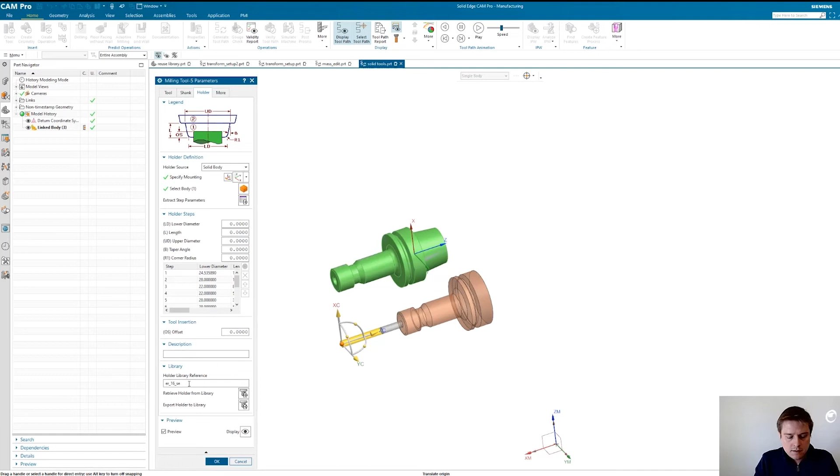Next thing we can do is save this holder to the library so it can be referenced when creating other tools that will use this particular holder. So I'll give this a library reference name, ER16 Solid Edge University, and then export the holder to the library. Here we can see there's an information window saying that this tool was created in the metric holder library.

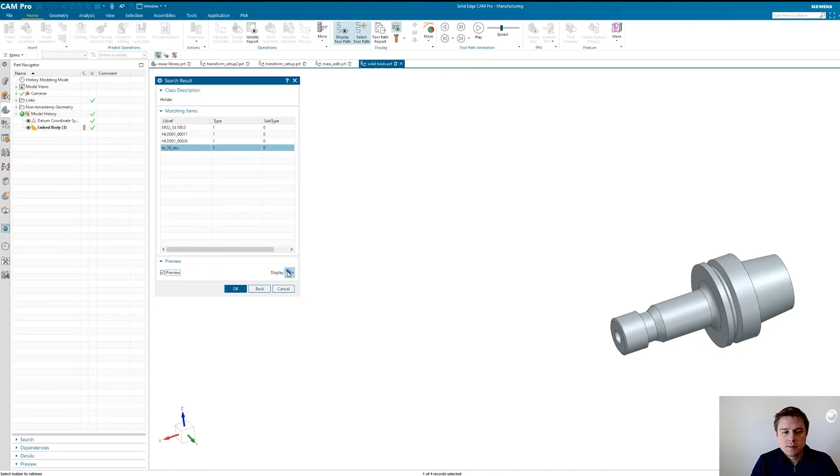So if I cancel out and create another tool, again I'll change the diameter of the tool just for visual reference. I'll switch to the holder tab, expand the library pull down, and now I can retrieve that holder that I saved to the library. Here we have our ER16 that was just saved. We can see a preview of the tool, and we can look at other tools that are in the library as well. Yep, we're going to use that ER16 that we just saved.

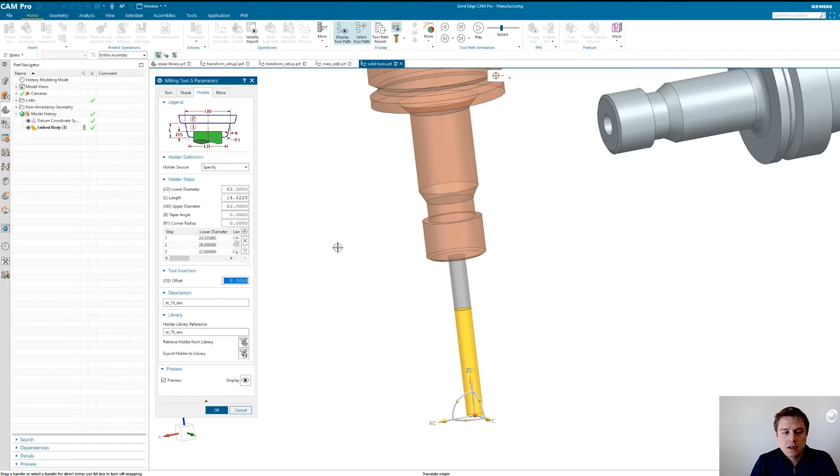Additionally, we can see our tool is sticking all the way out of the holder. In the holder tab dialog, there's a tool insertion option, and we can add a value to this to position our tool correctly, so you have a very accurate representation of what is actually set up at the machine.

Using the holder source tool available in CAM Pro will allow you to quickly and easily create an accurate tool assembly mirroring the real-world setup. With CAM Pro's digital twin capabilities, having the work holding and tool assembly matching the setup at the machine tool, you can create an NC program that is right the first time. If any collisions may occur, they will happen inside of CAM Pro rather than at the machine, avoiding downtime and costly collisions.

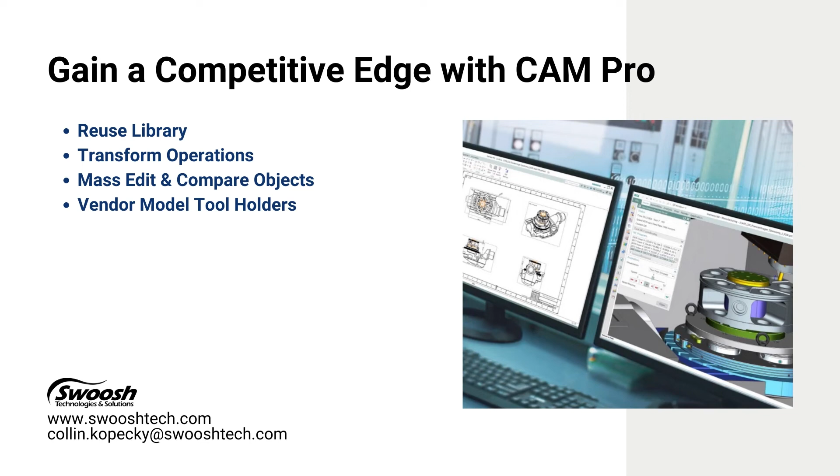To recap, if the manufacturing setup is not created with the Solid Edge part file, the reuse library will allow you to quickly add components to your manufacturing setup. If you have multiple parts, rather than programming each part individually, transform as an instance will allow you to copy the operations. Since the transform operations are instances of the parent operation, any changes made will automatically update. Using mass edit and compare objects will allow you to quickly edit multiple operations at once. And finally, the holder source tool will allow you to quickly create an accurate tool assembly mirroring the tool at the machine.